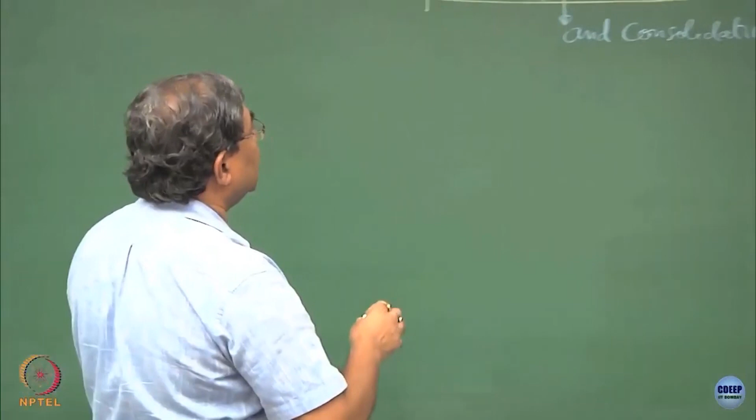So, in today's lecture I will be discussing the compressibility characteristics of the soil mass, and what I have written over here is compressibility and consolidation, because once we have understood the compressibility characteristics of the soils, we will move on to discuss the consolidation characteristics of the soils. As the name suggests, compressibility is the compression undergone by

the soil mass, and this is mostly because of the external loading.

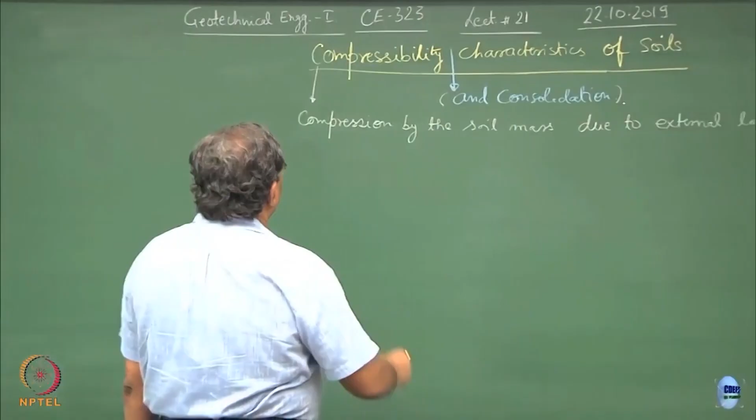In the previous lecture we have talked about how the stresses can be computed in the soil mass because of the external loading. Now, if I consider the compression of the soil mass, this is normally what we are interested in: the volumetric compression.

Now, volumetric compression of the soil mass would depend upon the state of the soil mass, and the type of loading which acts on it. We have already studied the type of loadings. This could be the point load, this could be the uniformly distributed load, different types of loadings which we have talked about in the previous lecture.

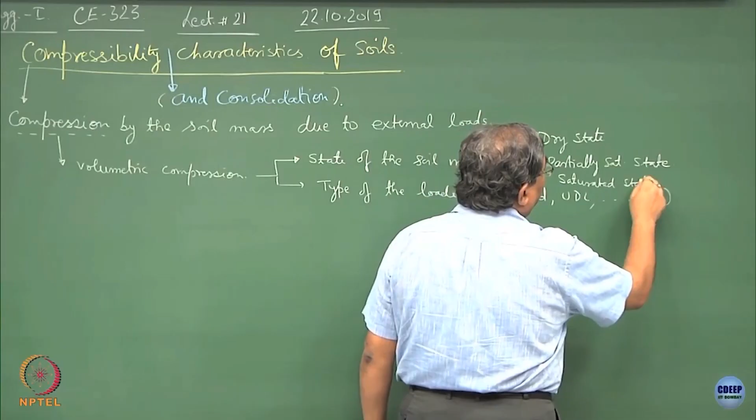Now, as far as the state of the soil mass is concerned, normally we deal with a dry state. It could be a partially saturated state, or it could be a completely saturated state. So, when we define the compression characteristics of the soil mass, it becomes important for us to understand what state the soil is in: dry, partially saturated, or saturated.

Now, suppose if I consider a surface, this is the ground surface, let us say, and there is some loading coming on top of this. So, normally we call this delta sigma. Now, delta sigma is the one because of the construction of this facility over here.

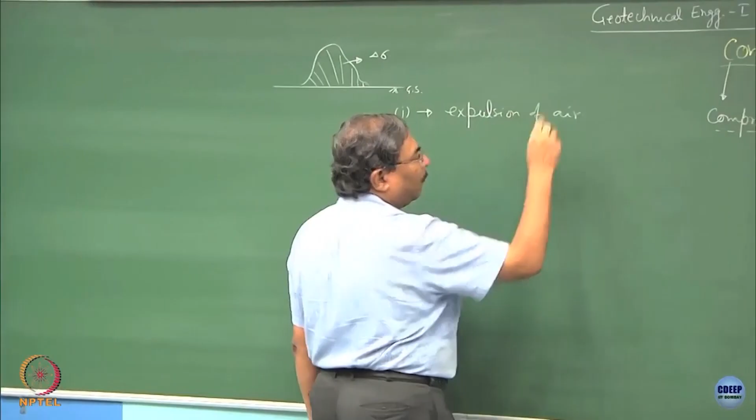Now, if the soil mass happens to be dry, what is going to happen? The compression is going to be due to the expulsion of air. Why? Because air is compressible,

as compared to the soil grains which are incompressible. And so is water also.

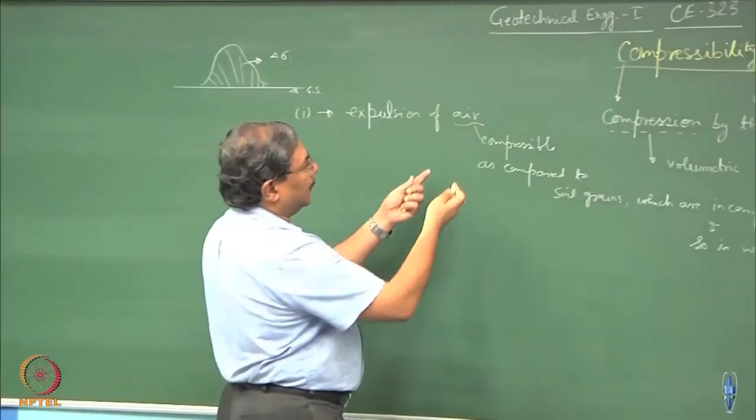If I am dealing with dry soil and if I load the dry soil system, the chances are that the air, being compressible, will go out, but the soil grains, which are incompressible, are not going to be deformed. However, when I change the scenario, I will talk about the third case directly, that is when you have the saturated state of the soil.

This is because of the expulsion of water, the volumetric deformation is going to occur, because water is incompressible, and it takes time to move out of the pores—there is a time lag.

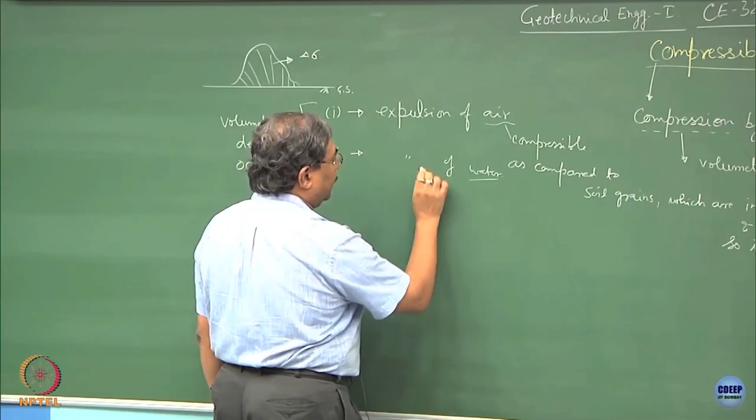That means this process of expulsion of water from the soil pores is going to be a function of time, and this is mostly because of the fact that hydraulic conductivities of the geomaterials are extremely small, particularly for the fine grained soils.

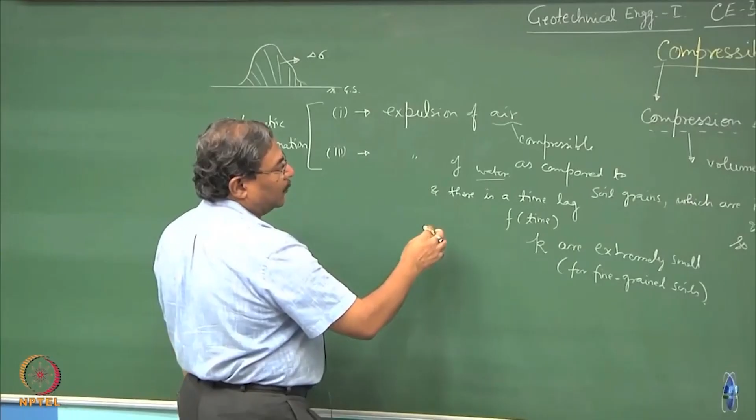So the situation is like this: the moment you load the system of soil mass from outside in the form of delta sigma, some air may expel out and there could be a compression. The major contribution of the compression is going to come because of this process, and hence we say that volumetric deformation of the soil mass is going to take place because of either the expulsion of air, expulsion of water, or the compression and reorientation of soil grains. So these are three responsible factors.

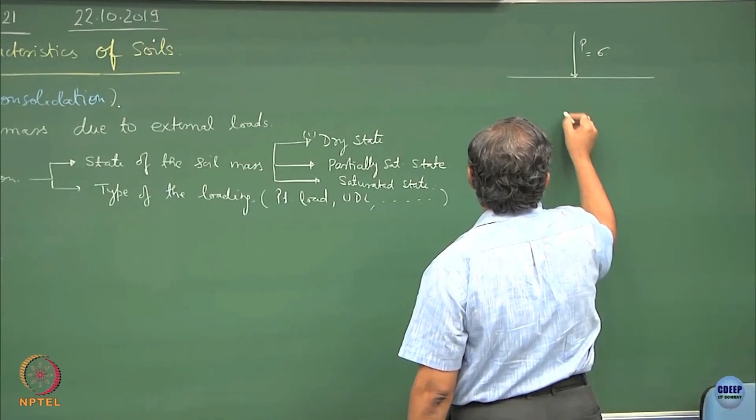Now, when I was talking about the particulate nature of the soil, I had this small model: suppose there is a loading P which delegates to sigma, and I had talked about two situations. Suppose this is the soil mass, and the lateral sides are unconfined. So this is the unconfined soil mass.

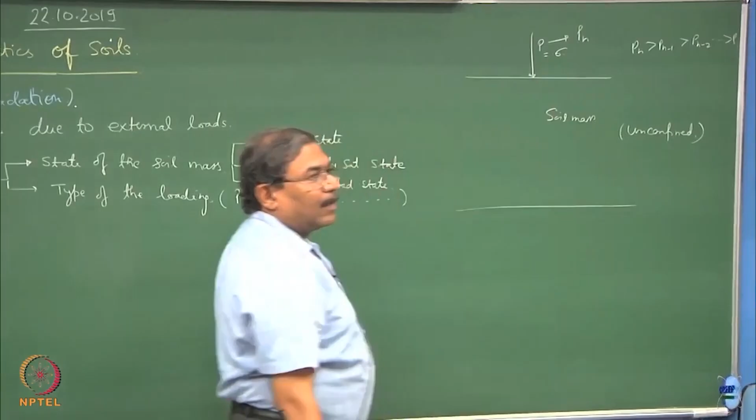If I keep on increasing the intensity of the load, say from P to Pn, where Pn is greater than Pn minus 1, which is greater than Pn minus 2, which is greater than P, what is going to happen? If I do not have a confinement, the tendency of the particles would be that first the whole soil mass will get compressed, and then because there is no confinement, the tendency of the soil mass is to flow out. So if I restrict Pn to such a limit that Pn itself is less than the yield strength of the soil.

Now, we do not write sigma y over here, we will be writing the shear stress. So suppose if I say the shear stress tau y, in this case only the compression is going to take place. Why? Because the shear strength of the soil is higher as compared to the stresses which are getting delegated into it, and hence there is no slippage, there is no rolling over, there is no reorientation of the particles, and hence this is a pure case of compression. This is what we are going to study today, Part A.

However, if the reverse is true, and if Pn creates a stress which is greater than the yield strength of the soil, this becomes a shear strength analysis. So shear strength dominates the mechanism of load transfer. Hope this part is clear to you.

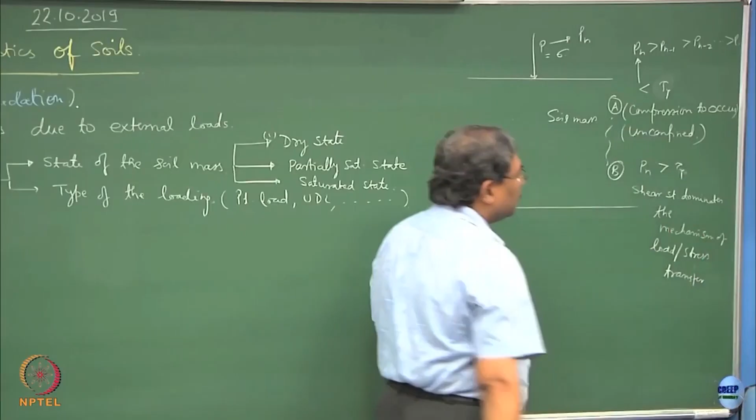So part number B we are going to do in the second course. This will be dealt with under shear strength theory, and not today. However, part 1A will carry on with the discussion on A. That means we are restricting to a situation where the state of stress in the soil mass because of the external loading is not going to exceed the yield shear strength, and hence compression only is going to govern the process. Is this part okay?

This is P, that means the load, and if you compute the stresses along with this, this will be sigma n greater than sigma n minus 1, and so on. So these are the stresses, these are the loads. Below this is the yield strength of the soil, the yield shear strength of the soil.

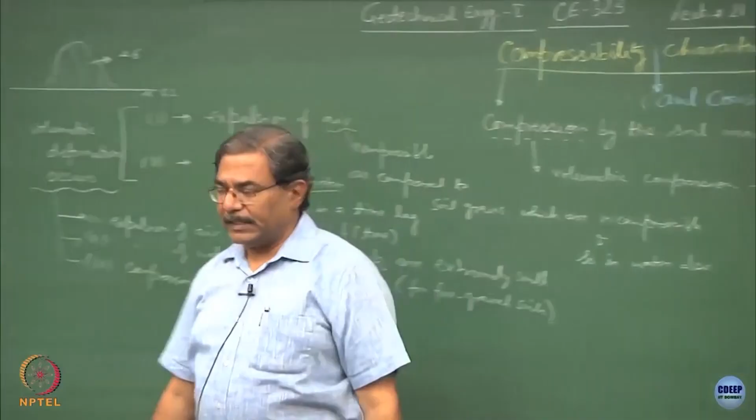So coming back to the issue, what we have done until now is we have defined compressibility in such a manner that this is a fundamental characteristic of soils as an engineering property, and it basically tells you about the response of the soil mass to external loading. A follow up of this would be the consolidation process, which we will be discussing in the subsequent lecture. So this is how the compression has to be defined. Now what I intend to do in today's discussion is talk about how to quantify the compressibility characteristics of the soils.

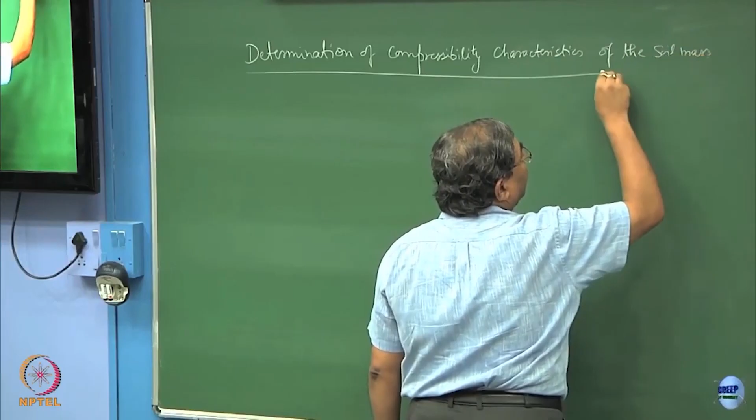So the question is, how would you obtain the compressibility of the soils? That is, the determination of compressibility characteristics of the soil mass. There are two ways. The first method is known as the oedometer test. We call it the oedometer test. Find out what is the meaning of the word 'oed'.

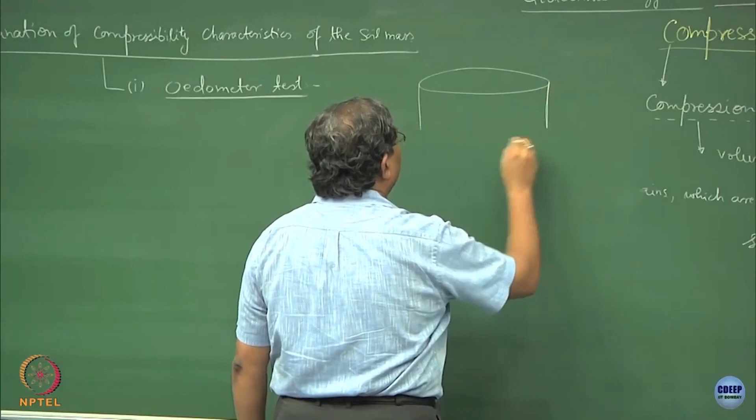So this is a hollow ring of steel, stainless steel, normally 75 mm in diameter and 25 mm in height, made up of about 0.5 mm thick metal. Now, this is the oedometer ring. Oed is basically a sort of swelling, so the name is an interesting name. This is what is known as an oedometer ring.

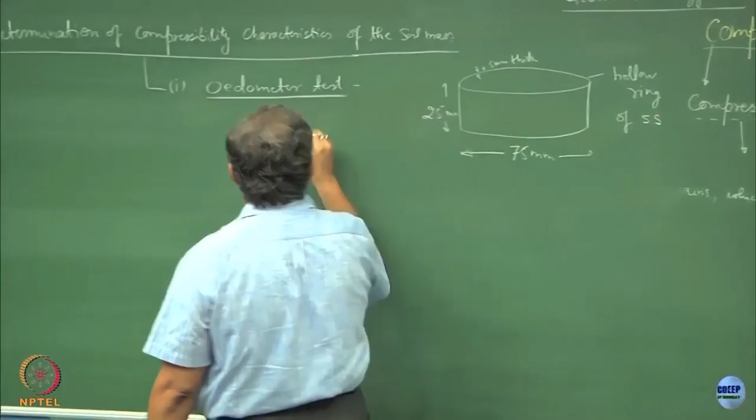So this is a stiff stainless steel hollow ring of dimension 75 mm and 25 mm. Sometimes people use 60 mm diameter, and the moment it becomes 60, this will become 20 mm. So these are the standard things.

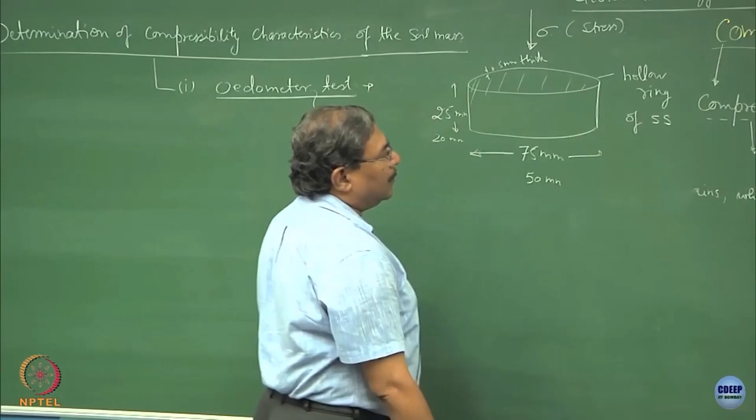One is by conducting the oedometer test, filling the soil sample in this ring and then applying a normal stress. Sigma is the stress applied on the soil sample, which is contained in a hollow ring made up of steel. Now, steel gives enough stiffness, and hence the radial strains in this sample tend to 0. That means there is no deformation of the steel ring. So when you apply the load on the soil mass, there is no radial deformation taking place in the system.

So this becomes the opposite case where we had talked about the unconfined. This becomes a confined boundary, and when a confined boundary is there, this is what gets simulated with the oedometer ring. When I load it, the only possibility is that the soil grains are going to get compressed. There is not going to be a shear failure. There is not going to be any rolling, and there is no slippage along the plates of the fine grained materials.

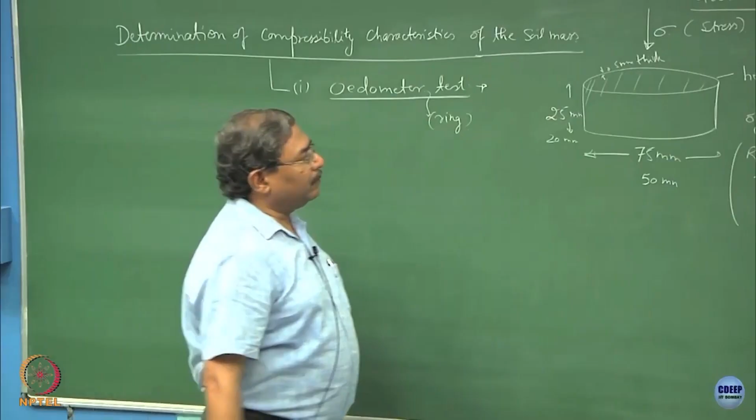Now, unfortunately, this is not a very realistic situation, because most of the situations which prevail in nature or in practice are 3-dimensional. I hope you can realize that this is a 1-dimensional loading and 1-dimensional deformation of the sample. So if I keep my sample like this, this is the sample to begin with, and the moment I have loaded it, normally rather than having a point load, what we do is we distribute this load on the surface. So this is how the P load is acting, which gives a sigma stress. Now, this is not a very realistic situation.

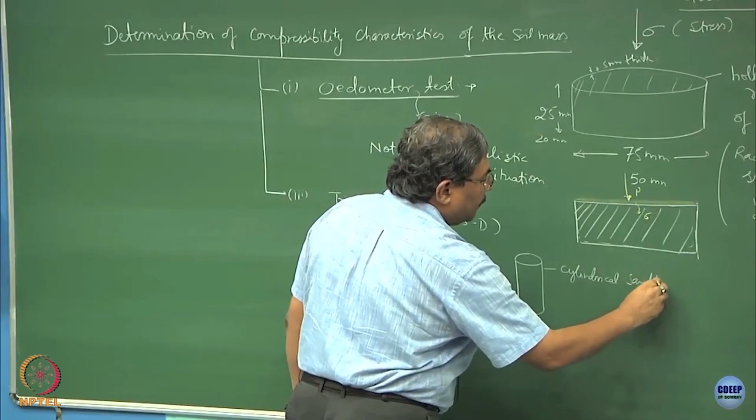So in order to create a realistic situation, what we can do is we can obtain the compressibility characteristics by doing triaxial testing. So this is 3-dimensional in nature. What we do is we take a cylindrical sample. You must have noticed here what we call the diameter d, and this is the height of the sample h. So we maintain the d by h ratio as 3.

This is what the typical situation is, and I hope you can realize why d by h is kept as 3, because in the previous lecture when we were talking about the stress getting induced into the soil mass, when the dimension of the loaded area is 3 times the height of the sample, all the stress bulbs which are going to get confined into the sample would be 99%. So geometrically we force all the pressure bulbs to remain confined in this system, and hence I can assume that the loading is uniform on the sample from top to bottom. That is the reason.

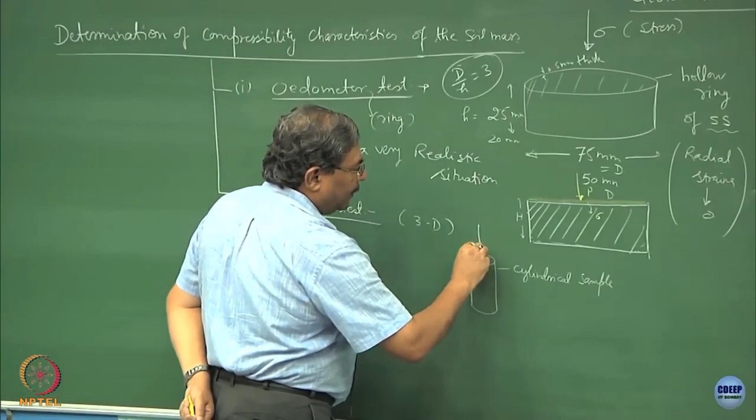So when we do triaxial testing, we apply, let us say, sigma 1 over here, sigma 2 over here, and then sigma 3 over here. Normally we maintain sigma 3 equal to sigma 2. So this also becomes a biaxial testing, but it is in 3 dimensions. When we will be talking about the triaxial test for obtaining the shear strength characteristics of the soil mass. So let us again remain confined to the oedometer test, which is 1-dimensional in nature.

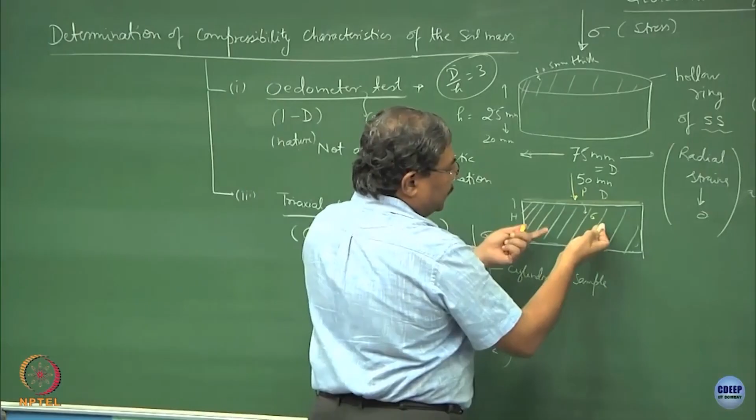And as I discussed, when you apply this stress, the deformed sample would look like this. This is the deformed sample, and I can say that there is a deformation of, let us say, delta h, and delta h is the reduction in height of the specimen of the soil, because we have taken some small portion of the soil mass, we have fitted it in the ring, and then we are trying to find out how the compression characteristics look like. Now, delta H is the compression also. So rather than writing reduction, in better scientific language, this can be replaced with compression. What is the significance of this?

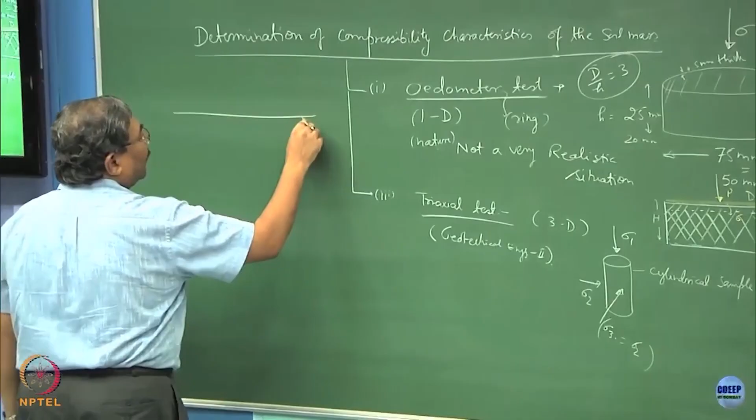If you have a soil mass, and suppose if I lay a foundation on the top of this, this much compression of the soil we are going to observe due to external loading, provided the soil is same.

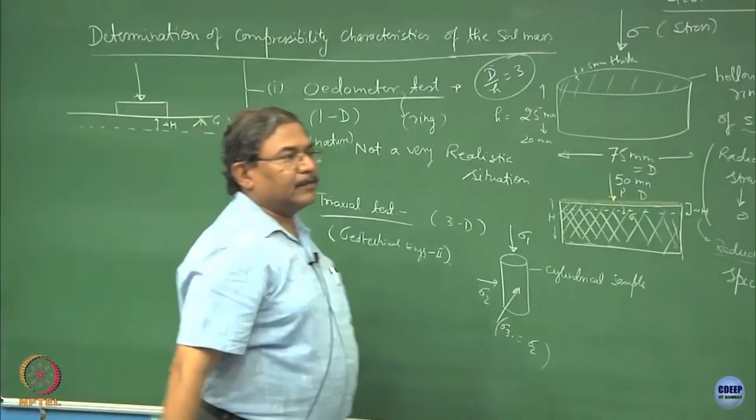This soil is same as what you have in the nature. You have taken out some sample, filled in the ring. Either I can remold this sample, or I can take rings which I insert into the soil mass, take them out, and this is how we collect an undisturbed sample. That sample can be inserted into the loading frame, and I can load it and get the deformation. This becomes the oedometer testing, which is what we are going to discuss in today's class.

Let me discuss a bit about the one dimensional oedometer test, or the consolidation test as we call it. There are two methods of doing the analysis.

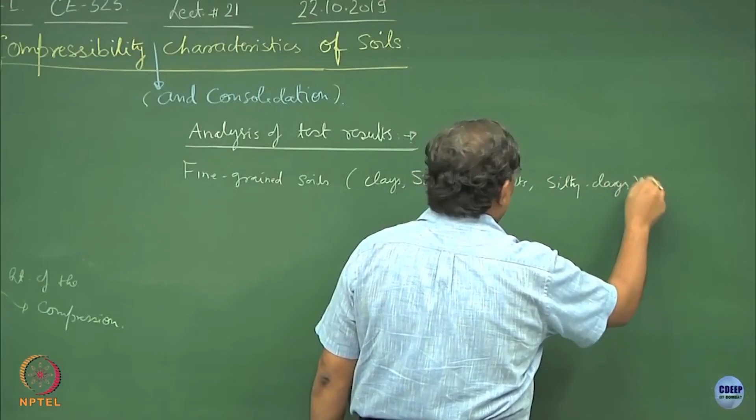Particularly when we are working with fine grained materials like clays, or silts, or clayey silts or silty clays, and so on. Normally, we do not talk about the compressibility characteristics of coarse grained materials, because the grains are incompressible, and hence there is no point in talking about the compressibility of the dry soils, particularly the granular material.

So, when we talk about the fine grained soils, in order to simplify things, what we do is we saturate them. How is saturation done?

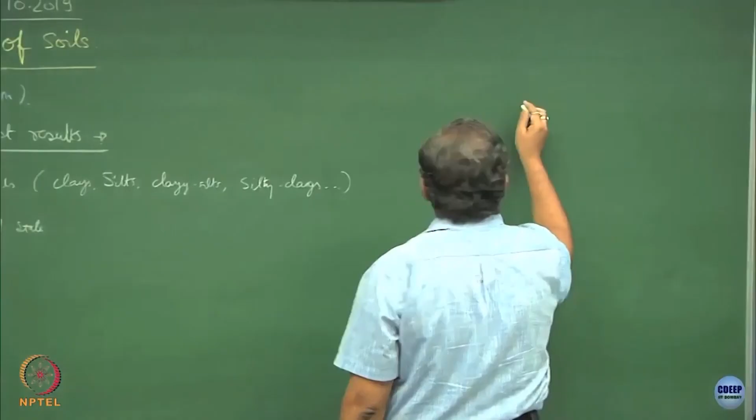This ring, which is containing the specimen of soil, is normally placed on a pad in such a manner that this pad has a groove in it. This is what is known as the base plate, and this base plate is connected with a drainage tube, or the drainage. We call this the drainage port, and this drainage port can be connected to a water column.

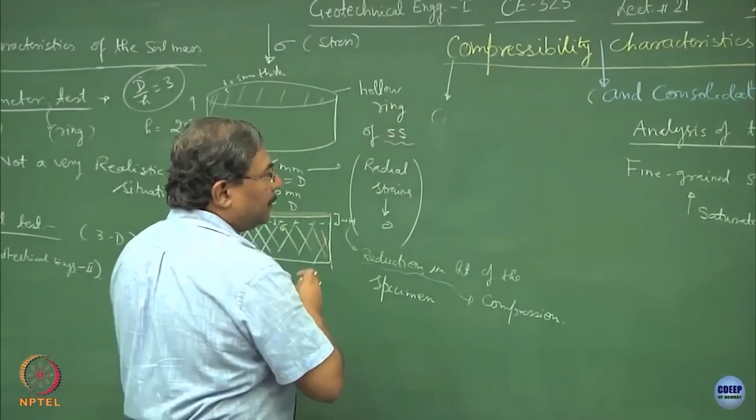What we do is, in order to spread the load which is coming on the sample, we put it on porous stones. So we place porous stones in this groove. This is the porous stone, and one similar porous stone is kept on top of the specimen which is contained in the ring.

So if I show you the ring like this, in which the specimen is contained, this is the oedometer ring, with a specimen of the soil mass. We will put a porous stone at the top also. So this is porous stone number 2, or you can say top and bottom.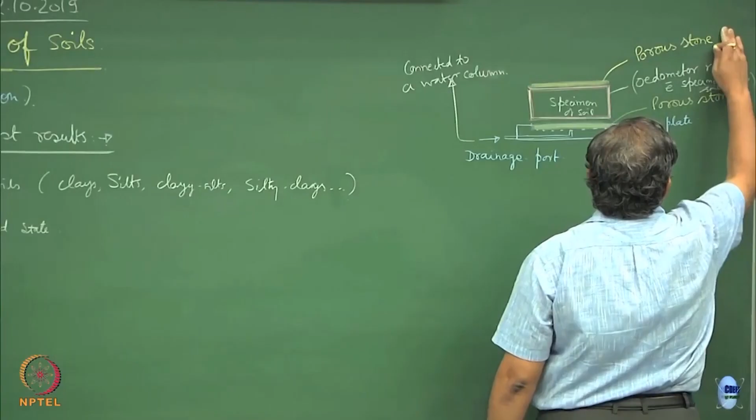On top of this porous stone comes a loading cap, made up of steel, and there is a groove in which I can keep a ball. So this is the loading cap, and this is the ball made up of stainless steel, and this is connected, the entire thing is connected to a load frame. So this is the loading assembly we can call it.

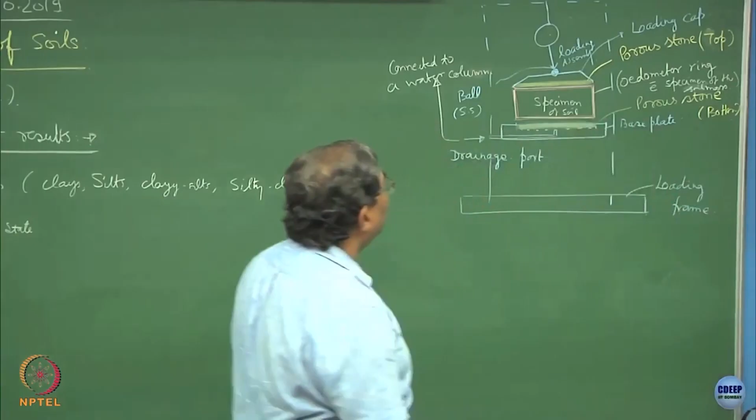So this is the machine, or the loading frame. I can read how much load I have applied, or I can devise a system by which I can apply a certain known amount of load on the plate. I also attach a dial gauge over here.

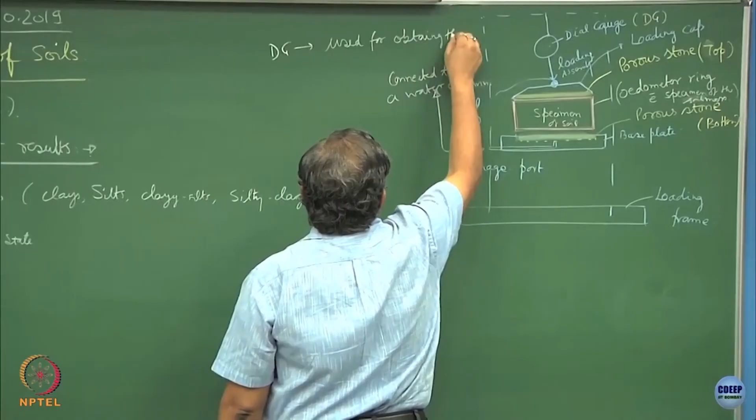This dial gauge gives us the deformation undergone by the specimen when it is loaded. So dial gauge, DG, is used for obtaining the delta H. Dial gauge gives you the readings that after you applied the stress or load on the sample, how much deformation the specimen is undergoing, that is delta H. And I hope you can realize that the area of cross section of the specimen remains constant, and hence delta H is also equivalent to delta V, the volume.

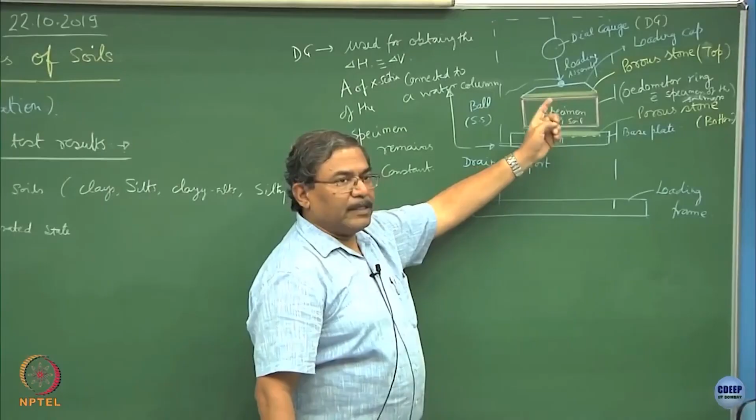Now, choice is mine. If I want to do a study on a dry sample, I can do it. You can prepare the sample, take dry soil, pack it in the oedometer ring, apply stresses and obtain delta H. I can vary the moisture content of the fine grained materials, fix them in the oedometer ring, and study the compressibility characteristics.

Normally, when we deal with fine grained soils, to make life easy, we saturate it, we make sure that the sample remains saturated always. So when we do this test, we open the valve and allow water to remain always filled up in a container which is a bath. This becomes the water bath, and this remains flooded, in fact the water bath should be up to the higher limits of the specimen. So the water can be maintained up to here.

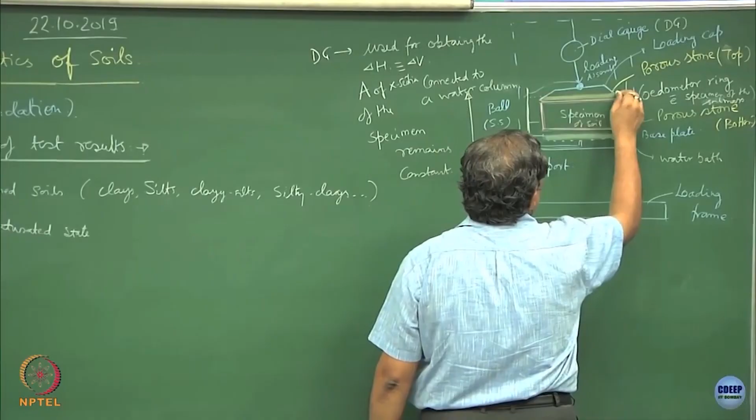So the sample or specimen remains submerged in water all the time, and hence we are ensuring that we are obtaining the saturated state deformation characteristics, compressibility characteristics of fine grained soils in particular. We should do this test to understand things better, or maybe see some videos where these type of demonstrations have been done.

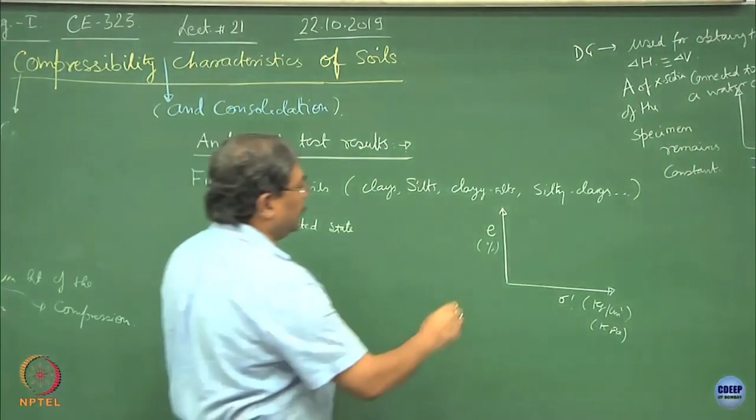As far as the analysis of test results is concerned, basically what I want to do is obtain a relationship between the void ratio and sigma prime. Sigma prime is in kg per centimeter square, sometimes we also write it in kPa. Void ratio is going to be in percentage, and whatever relationship I get, this becomes the compressibility characteristics.

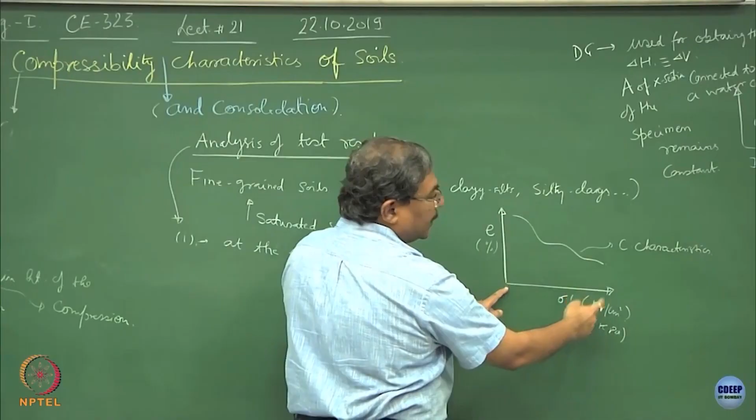There are two methods of doing this test. The first one is where at the end of the test, meaning the objective or target effective stress level has been exposed to the sample. Normally effective stress is exposed on the sample in steps. So when we say at the end of the test, that means a number of loadings which are normally doubled. So suppose if you start with sigma prime, 2 times sigma prime, 4 times sigma prime, 8 times sigma prime, 16 times sigma prime, and so on.

Between each incremental loading, we wait for 24 hours for the dial gauge readings to stabilize. In other words, we give 24 hours of waiting time for the specimen to undergo the maximum possible deformation, or compression.

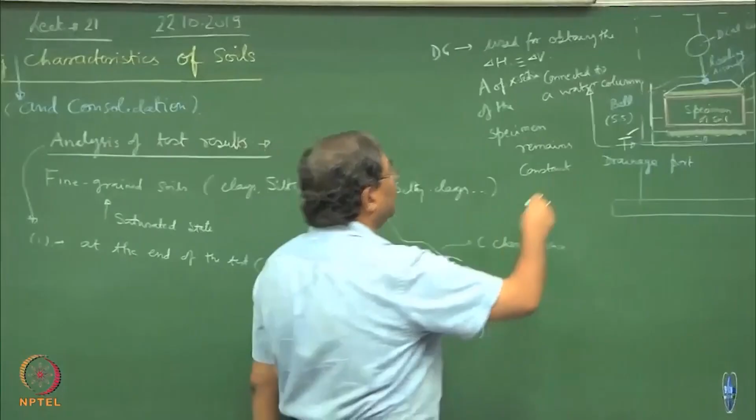So we can find out how much sigma prime is required, and apply that much load, because area of cross section multiplied by sigma prime will be the loading. Normally you take first load, then 2 times the second loading, and so on. So at the end of the test, once the number of loadings have been achieved, you find out the moisture content.

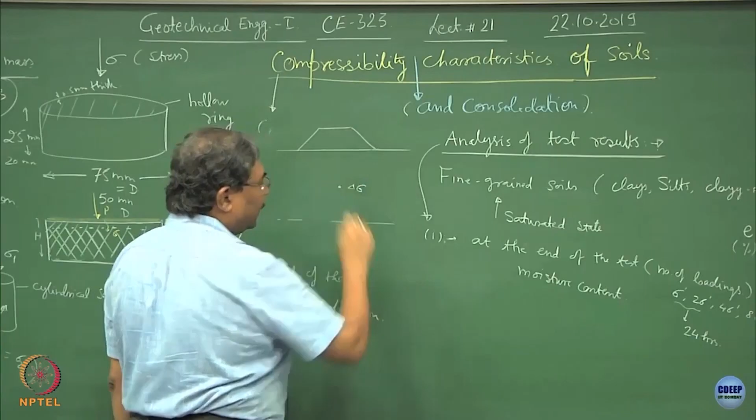How is it done? Suppose if I am a designer and I want to design, let's say, an embankment which is going to come on the ground surface. Remember, we have obtained the stresses coming at this point because of the external loading -- that is delta sigma. So this becomes my design stress, which I am going to expose onto the specimen to get its response, and hence I know what is the total magnitude of delta sigma which I have to apply on the specimen.

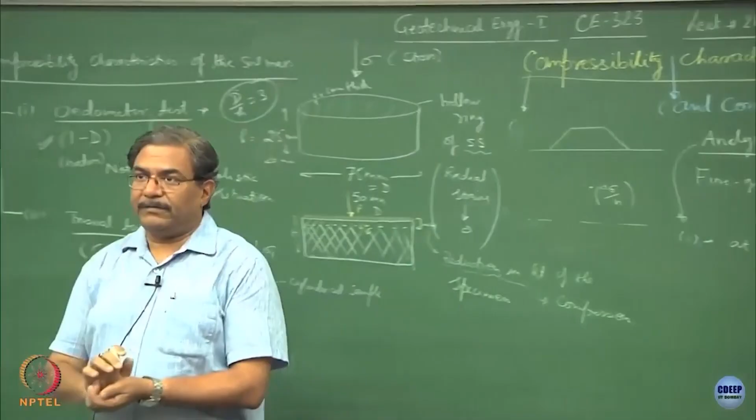I can break it into small cycles, or number of steps, so I can apply delta sigma by n and follow this pattern of doubling the loading, which is the standard procedure, and complete the test. Once the test is over, you remove the ring containing the specimen, weigh it, and find out its moisture content. Suppose this moisture content is W.

In the second procedure, what we do is at the end of the test, take out the ring containing the specimen, dry it up, and find out the dry weight of the specimen, which is Ws. So these are the two methods.

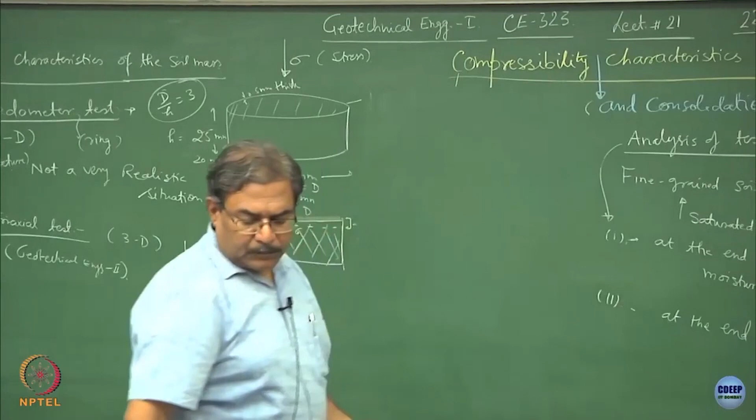In the first method, when we are dealing with moisture content, if specific gravity is known, multiplied by moisture content, this will give me S into E. Now I am making sure that the specimen remains saturated all the time by doing this arrangement of water bath, and the water bath remains filled up with water, so the specimen remains saturated. So S is 1, that means the void ratio is G into W.

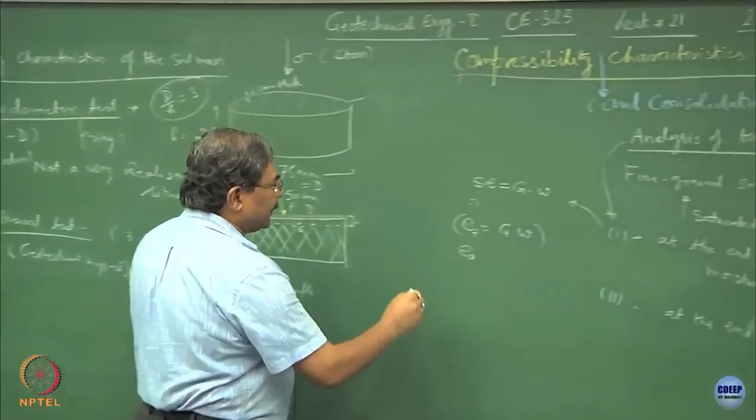If I know the initial void ratio E naught, and this is the final one after the test, then I can say that delta E is E naught minus EF.

Making sure that I am doing one dimensional analysis -- remember, area of cross section is constant -- I can say that delta V upon V, the volumetric strain which the sample has undergone, is equal to delta H upon H, where H is the initial height. So suppose if I replace this by capital H, and delta H is the change in height of the sample, this will be equal to delta E over 1 plus E naught. So this is a relationship which can be utilized.

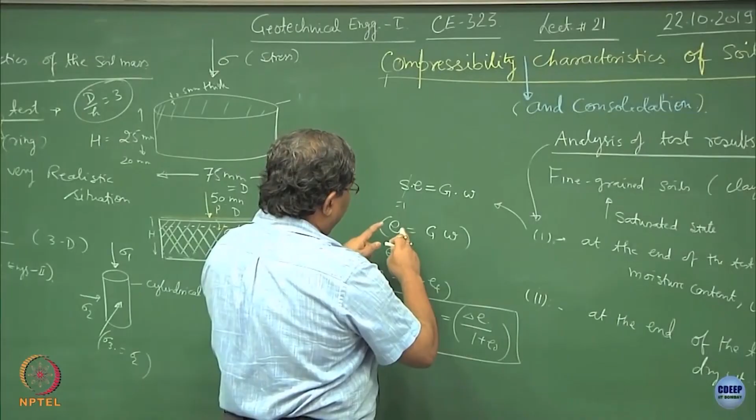So, here what I have done, I have got the final void ratios, I know the initial void ratios, delta H can be obtained at every change of stress. So, if I try to recomplete or complete this graph.

I know the initial void ratio which is known at a very small stress, we call this as the seating load or the seating pressure. This is just to maintain the contact between the sample and the top plate, because if you do not allow any seating load, there will be initial disruption in the readings. So, this is the point from where we are starting the compression process.

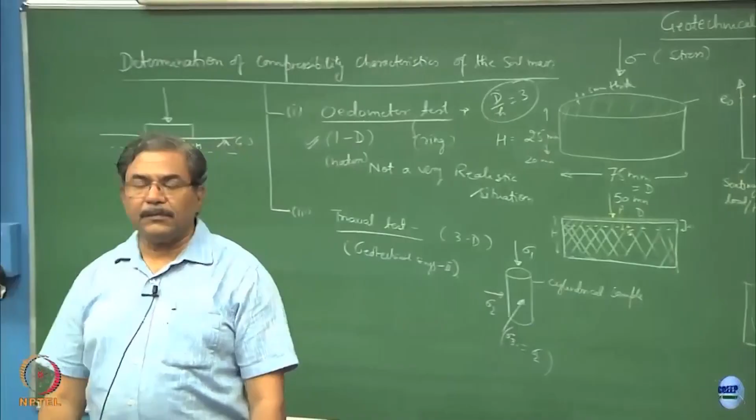So, suppose if you take the first increment of the load sigma 1 prime, because the sample is saturated and submerged, you have to reduce the pore pressures and compute sigma 1 prime. But I am sure you must be realizing when we are doing the oedometer test and we have put porous stones at top and bottom, we are ensuring that the pore pressure does not remain contained in the specimen and gets dissipated. So, basically U turns out to be 0 and hence sigma prime is same as sigma. So, this is how the relationship would look like.

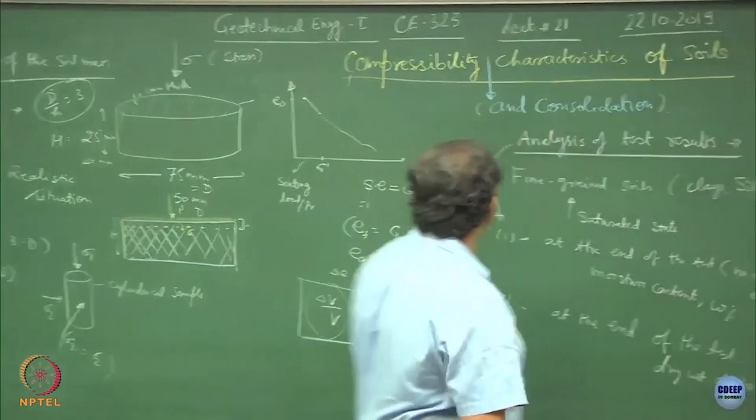So, this is the function which I have created from E value. Now, how would you get E from this relationship? So, delta E will be equal to 1 plus E naught into delta H upon H. E naught is known, change in height of the specimen which can be obtained directly from the dial gauge reading, and I know the initial height of the sample, I can compute delta E, and from there I can back compute, starting from this point to this point, I can fix the relationship. So, once I have E versus sigma prime relationship, I will tell you how to do analysis further.

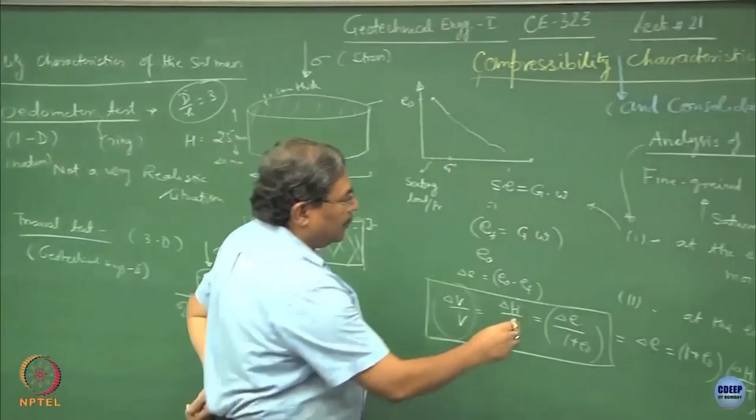The second method is, at the end of the test you find out the dry weight of the specimen, which is Ws. So, if I know the Ws, this thing divided by area of cross section multiplied by G into gamma W, what this value will be?

Sorry, very good. So, this will be the H final, is this correct? Nice. Why? Because once the test is over, you have taken out the whole thing, you can subtract the weight of the ring from the total dried weight of the specimen, you get Ws of the specimen, this is the area of cross section, and G into gamma W is the density, clear. So, weight upon density multiplied by area of cross section will be the height term.

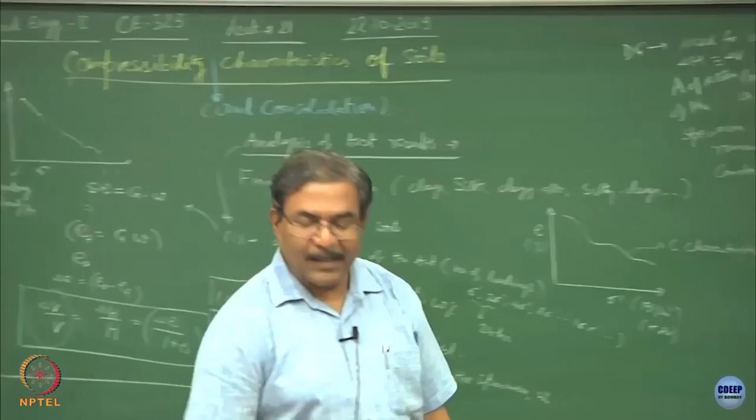So, HF I have obtained. I hope you can realize we have fixed this dial gauge to get the change in the H value, and what I am getting from here is final HF. So, at each incremental loading I know the value of H also. So, this can also be utilized to compute the void ratios by using this relationship. Choice is yours, whatever you find easy can be utilized. So, nothing is changing except for Ws, the weight is corresponding to the final stage, so HF is fixed.

So, in most of these situations what we do is after getting the final point we back traverse to the initial value. So, HF once you have obtained, delta HF will be equal to H naught minus HF, clear.

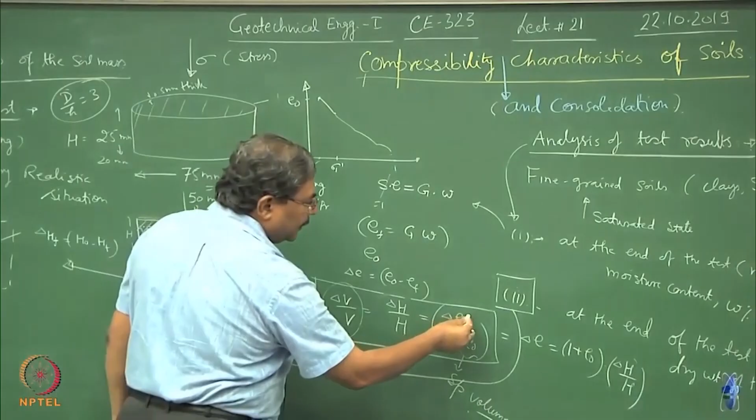Now, delta V upon V is the volumetric strain, which is same as the vertical strain of the sample, which is equal to change in void ratios upon 1 plus E naught. If you remember, when we were talking about the 3-phase system of the soil, we had used 1 plus E naught term as a specific volume. So, it is a sort of normalization of the change in void ratios undergone by the system because of the compression for a specific volume of 1 plus E naught. So, this is how you normalize the things. So, 1 plus E naught is a normalization parameter which is known as a specific volume.

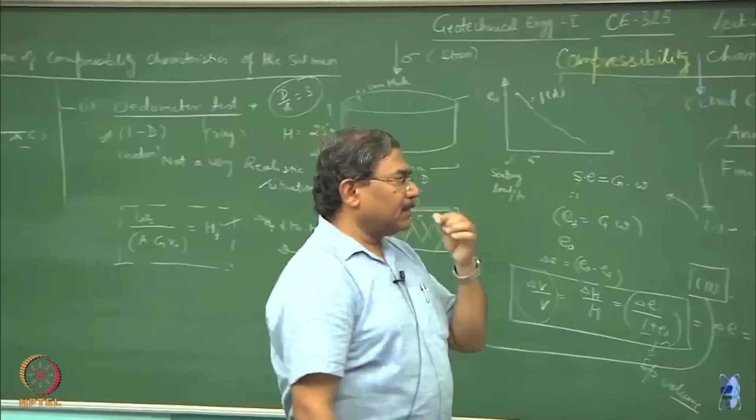So, implicitly what we are not plotting on these scales is, I hope you can understand, the time, because each step is a function of time. So, this time we assume to be 24 hours and we make sure that the dial gauge readings have subsided. Normally the practice is you keep on observing 3 to 4 dial gauge readings, and once they are constant we can go for the incremental loading or unloading. So, if 3 dial gauge readings are constant, we assume that the sample has equilibrated.

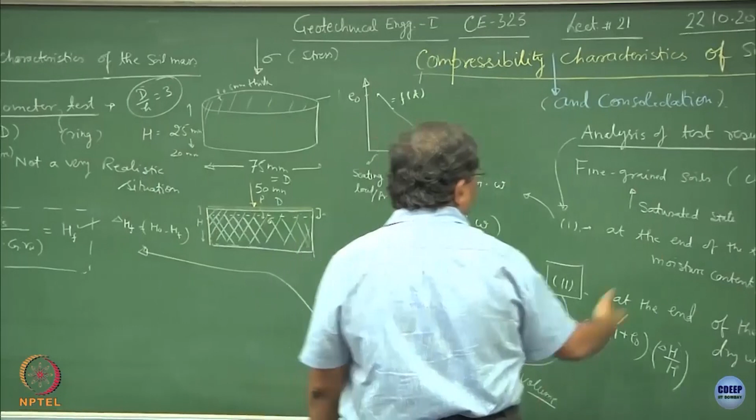These tests look very simple, but you will be surprised to know that till date the profession depends upon these tests to get the correlation between what is happening in the field, once you have taken a sample from down below and tested it in the laboratory. There is no other way to do the analysis of what has caused the failure of geotechnical structures, foundations, embankments, or any structure you are making out of it.

Now I would like to interpret this graph further because this is the crux of the matter. By conducting these experiments, we have got a relationship between void ratio and applied stress. Let us analyze this relationship and see what can be deciphered. Typically we get a relationship like this, as shown here.

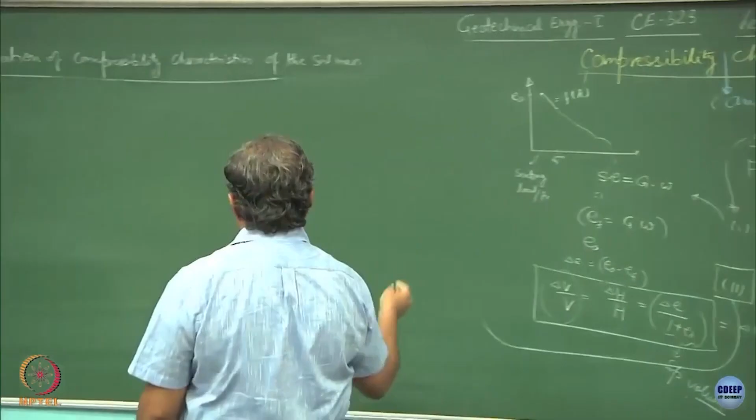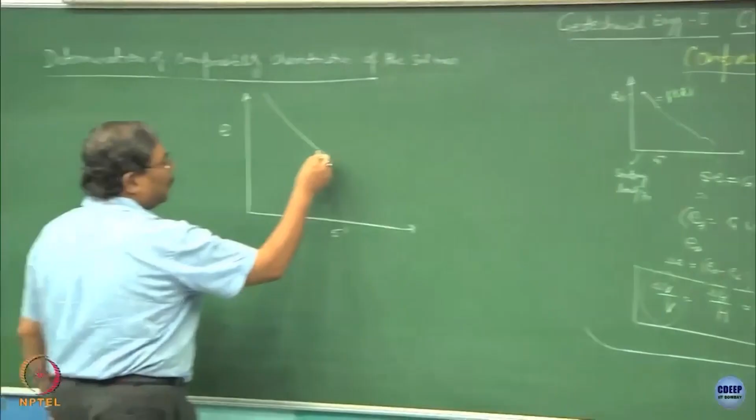So at this point, if I unload the sample, this is how the response looks like. This is the loading curve, and this one is the unloading curve, or unloading response.

This point is defined as the pre-consolidation pressure, and we define this as sigma p prime. This has a lot of interesting knowledge built into it. We will discuss about this.

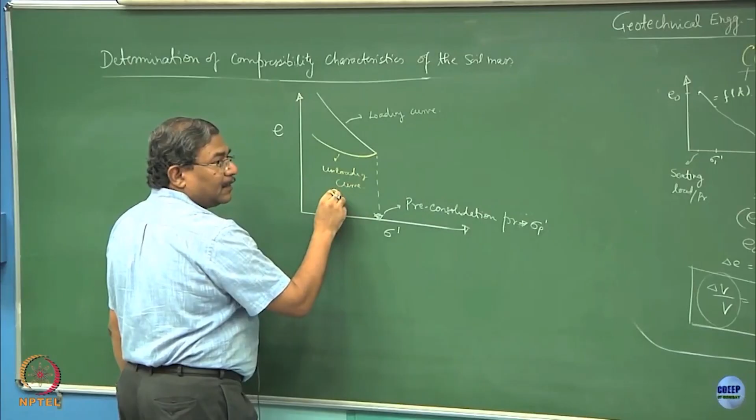This is also known as the compression curve, and this is known as the swelling curve. This is the compression curve, or compression characteristics, you may say. These are the swelling characteristics.

Now one interesting thing to observe here is, this is how we started the test with the E naught value. What you observe is that point A and point B will not match—A and B do not coincide. What is the reason? The first reason is because the soil sample is non-elastic.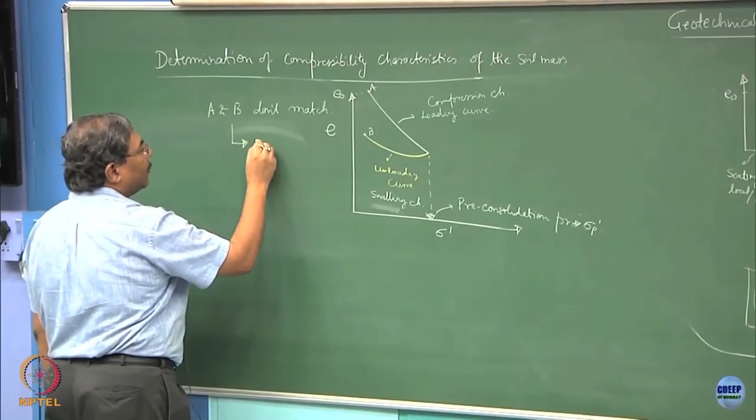Because truly speaking, E upon sigma prime is nothing but a sort of stress-strain curve, is it not? You must have noticed that if I normalize it with the E naught value, this becomes E upon E naught, or even delta E upon E naught, which is strain versus stress. So this is first of all because of the non-linearity of the soil.

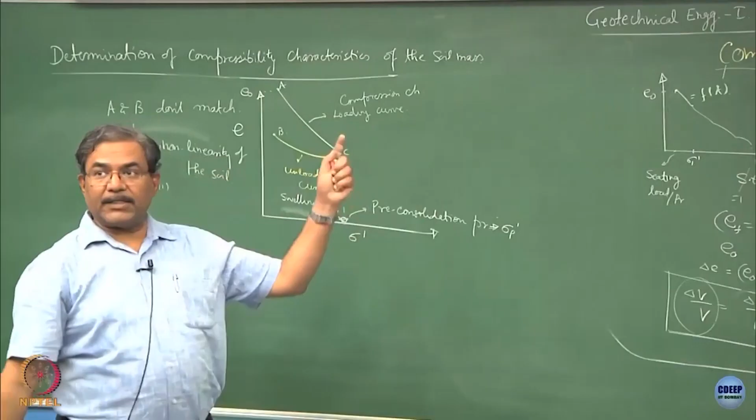Number two, regain of—yes, correct. So what you have done from A to C is squeeze out water from the soil sample by applying the external load, and water, being incompressible, has moved out of the specimen. Now C to B is a sort of unloading behavior. A little bit of water can be sucked back by the sample—that is also valid, what we call capillary intake. This is less than the water expelled out, because the uptake capacity of the soil in compacted form is less. The most important thing is why A and B do not match: because of the friction.

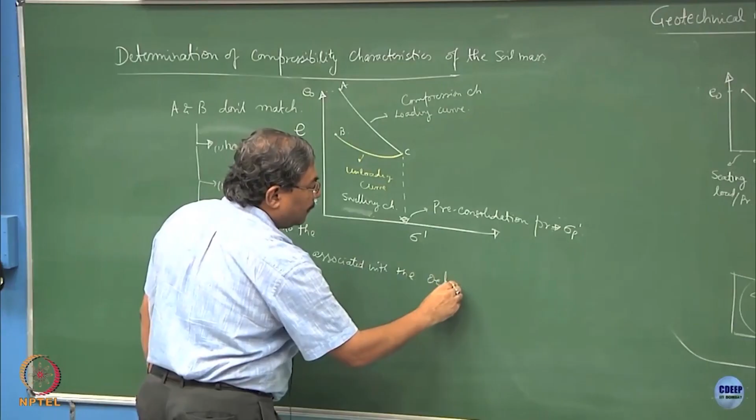This is the friction offered by the ring. Due to the friction associated with the oedometer ring, B is not allowed to coincide with A. It is an inelastic material, fine.

So this is known as the unloading curve or swelling characteristics also. Now suppose if I reload the sample from point B onwards, this is how the reloading would be: B to C to D.

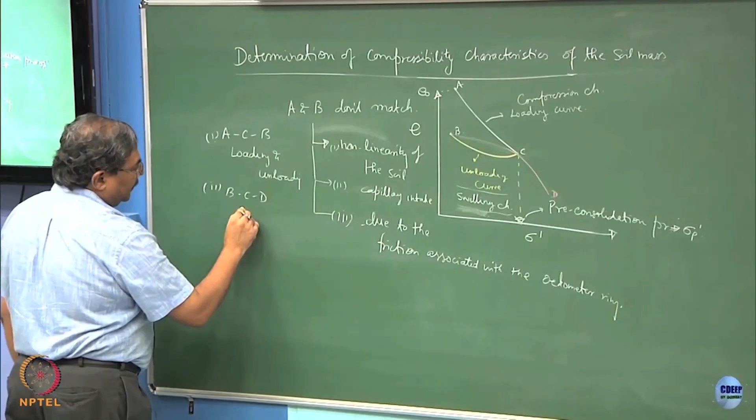ACB is loading and unloading. BCD is, I would say, reloading, or sometimes people also call this recompression. Now one interesting thing here to see is, if I reload the sample from B, it passes through point C and goes up to D. I am sure you will realize that BC has formed a hysteresis.

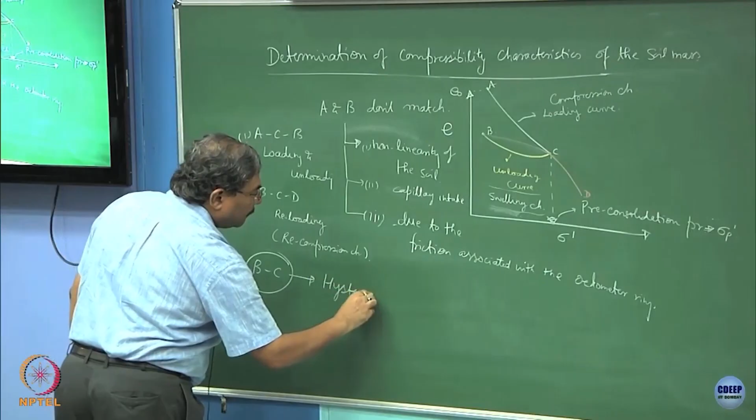Hysteresis is associated with the memory of the material. So from this point onwards, I respect soils for having memory. This point will get clarified very soon. Soil behaves as if nothing has happened to it, and if you look at ACD, this becomes a continuous curve.

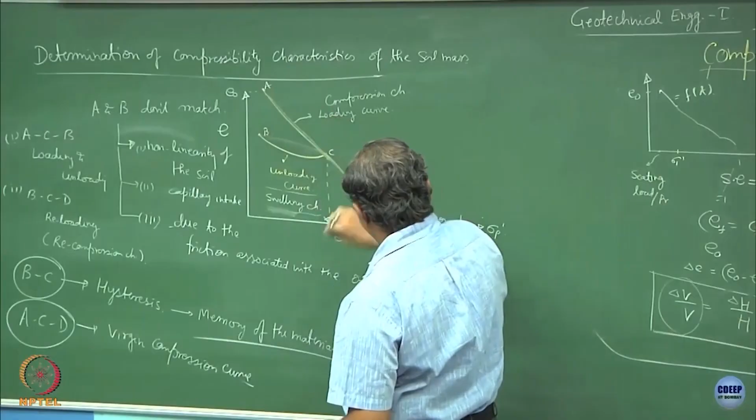So, A to C to D remains a virgin compression curve, as if nothing has happened to it. So, for all practical purposes, I can assume this to be something like this. So, this happens to be its past. All sorts of torture which you have given to the sample goes into the memory and it maintains it.

Now, this concept is used quite a lot when we talk about the shear strength theory of the soils. Now, what is the interpretation of C to B to C? So, unloading and reloading cycle. Why have we called this the virgin compression curve? As if nothing has happened to this from this point onwards. So, pre-consolidation pressure is the point, or the pressure, above which the sample is going to behave as normally consolidated.

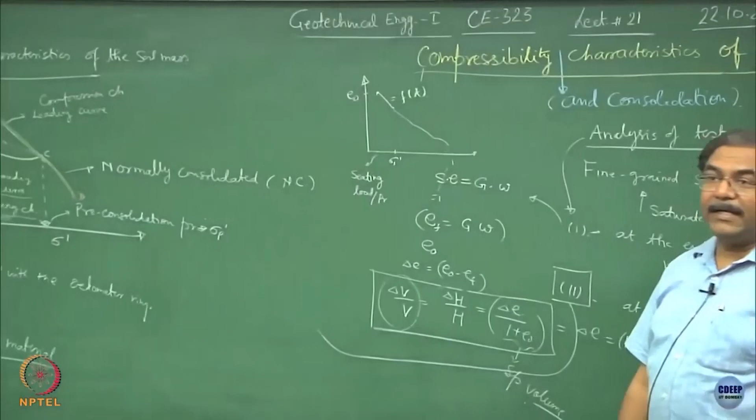We call it NC response. From this point onwards, you will realize that the material vanishes and the state of stress in the material guides the entire mechanics of the material. So, we do not bother whether this is clay or another soil. As far as the pre-consolidation pressure is concerned, that becomes the basic characteristic of the soil mass, which is going to help us in designing the systems.

From C point onwards, when you did unloading, this creates the OC behavior of the soil, which is known as this, the OC behavior. We call it over consolidated soil. Alright, so by definition, if I define a term OCR,

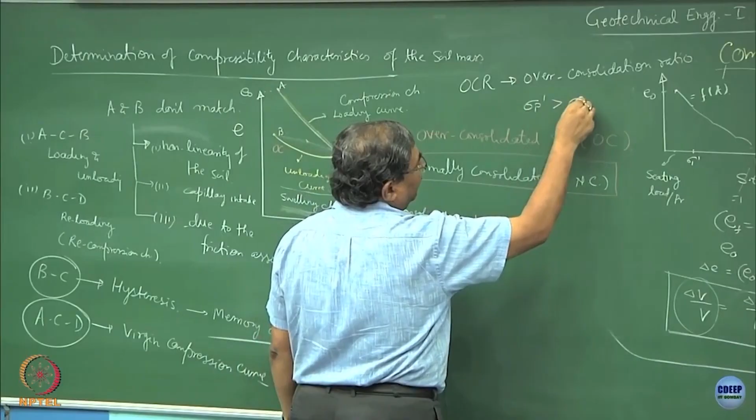which is over consolidation ratio: if the sigma p prime is greater than sigma prime, at this point what has happened? The material has already experienced a very high effective pressure as compared to the unloading part. So, these type of soils are over consolidated, they will show less settlement, less deformation, less compressibility.

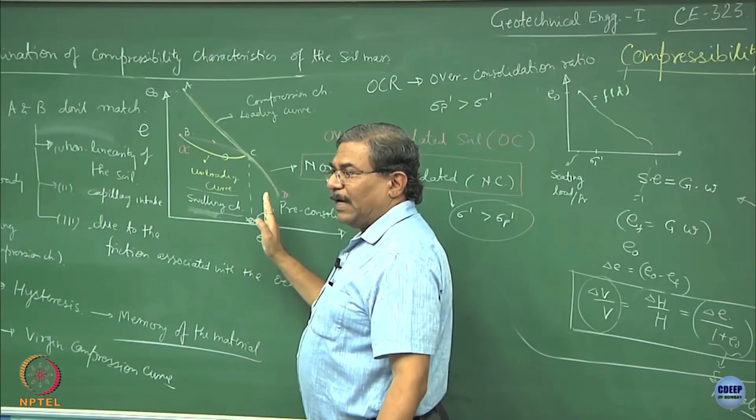However, if your sigma prime happens to be greater than sigma p prime, this is the case of the normally consolidated soils, where the deformation, the settlements, and the consolidation is going to be much more. So, what I have done is, by utilizing the concept of pre-consolidation pressure, I have characterized the soils, and as an engineer technologist, I will be more interested in utilizing the soil mass when it is exposed to the stresses rather than anything else. So, this is the best possible engineering characterization of the soils based on the history of stresses the system has already been exposed to.

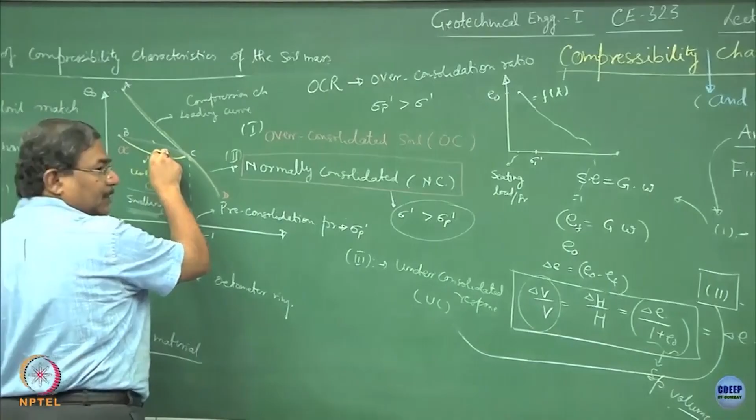There is a third category which is known as... so this is the first one, over consolidated response, normally consolidated response, and the third one, which is known as under consolidated. We call it UC. In this case, the present pressure is higher than the previously exposed pressure to the system, sigma p prime, and hence this is NC material.

Later on we will link these three things with the pore water pressures. So, in OC materials, normally the pore water pressure is always negative. Why? Because, as you rightly said, they have a tendency to suck water. So, the tendency of the material becomes to suck as much water as it can take up. This becomes a situation where negative pore water pressures prevail in the soil sample. In NC, normally we have positive pore water pressures.

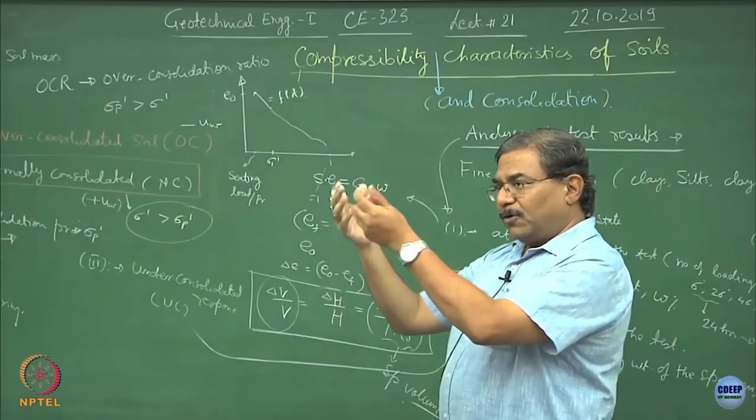So, suppose if I give you two situations: the soils which are formed in the Himalayan region, and the soils which are getting formed in the Sundarban delta, which we discussed in the beginning of the lecture. So, imagine the case of the deltas, every day a fresh load of sediments is coming and getting dumped into the ocean beds. That means the present pressure is always higher than the past pressure. So, this becomes a normally consolidated material.

However, upstream in the Himalayan region, what is happening? The soil is getting eroded day by day. So, the present pressure is always lesser than the past pressure. So, this is the situation of OC material. So, the soils which are in the Himalayan regions are over consolidated as compared to the ones which are in the Bay of Bengal.

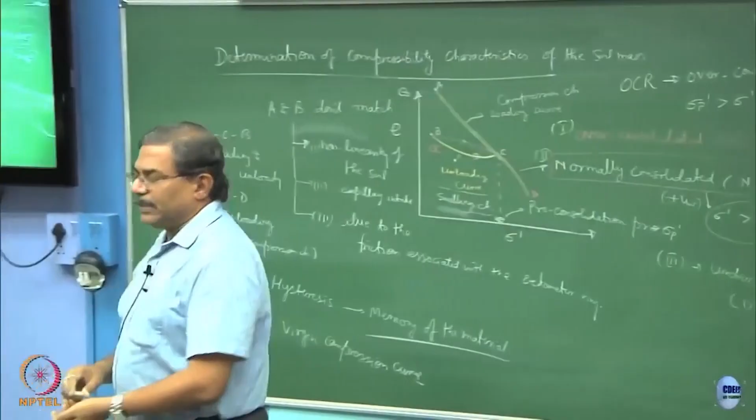So, have you understood how from a simple test we have deciphered so much information about the material, and that too in a one dimensional compression situation. Under consolidated is the one where the past pressure is equal to the present pressure, something in between. So, this is what is known as the under consolidated response.

So, these are normally used in defining the state of the material and how to utilize this as a construction material.